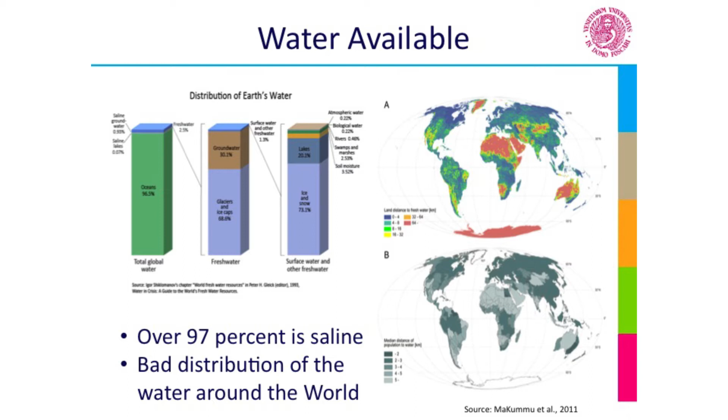And also we have to analyze that there is a bad distribution of water around the world, with a large part of the world where water is not available, and we can see on your right the distance that sometimes there is between the people and the first catchment of water.

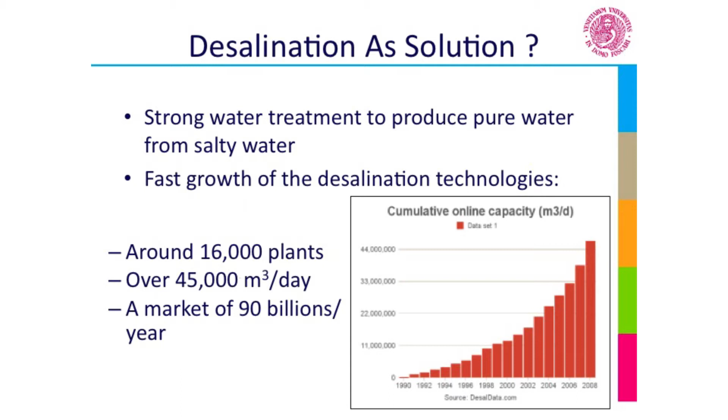And so in the last few years, decades, people started to think about desalination. Desalination is a technique that tries to take the salt out of salty water to have pure water to give to the people. Desalination technology is a strong water treatment, normally with high technology, with high expense of energy, and it is also very expensive to have it.

But in the last years, because of that bad distribution of water, these techniques are growing very fast. In fact, right now there are around 16,000 plants with over 45,000 cubic meters per day of water treated, and with a market that is increasing very fast, that right now is around 90 billion euro per year.

But as I said before, desalination is a technology that needs a huge investment for the plants, for the technology, for the techniques, and also for knowledge. In this way, only the rich and more developed countries can afford to pay for water from desalination plants, and also maintain them. They can operate with this technology.

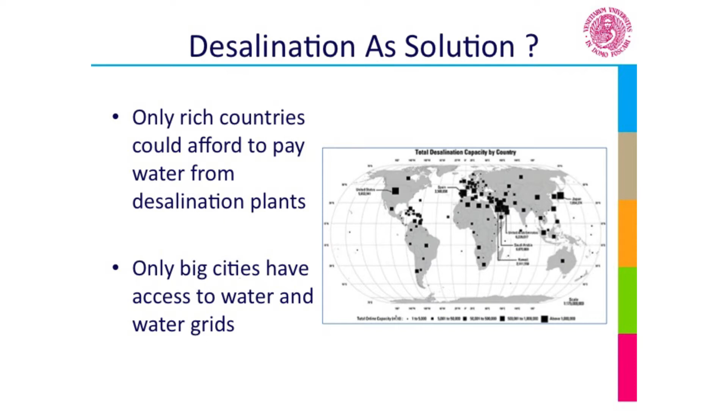So it was necessary to find a solution, a way for developing countries to more easily get pure or drinkable water from bad quality water. Another problem is in fact the distribution. Only the big cities can have a water grid, can have potable water, and it's quite difficult to find good quality water in the countryside or in isolated places.

So we have to find small plants, easier to maintain, that at the same time can be put in isolated places. Desalination is composed, first of all, of two main techniques. One is with membranes, for example RO, reverse osmosis, or the thermal process. In the thermal process, we heat the salty water or the wastewater, then we collect the vapor and condense it, and we have pure water.

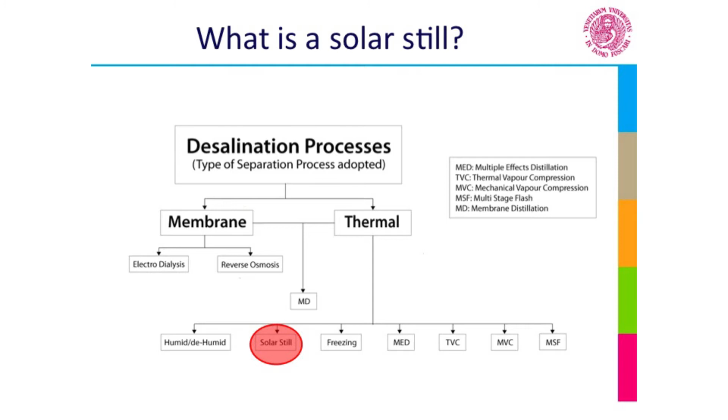One of these technologies that I underline is the solar still. I'm going to explain what a solar still is. The solar still looks like a simple greenhouse where we put the water inside. The solar energy enters the greenhouse, and through the greenhouse effect we have evaporation of the water.

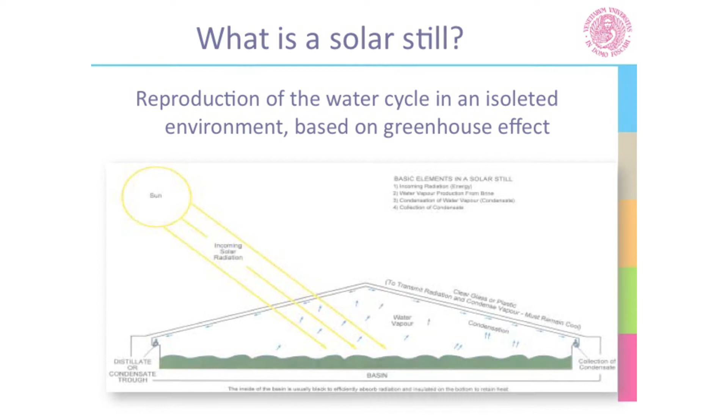The steam condenses on the internal surface of the transparent cover, and we collect the pure water. The salt remains on the bottom, in a black bottom basin, and in this way we have pure water in an easy way, with an easy technology, we can say, and also easy to understand. This is the main issue for the people in developing countries.

So the solar still has some advantages. First of all, the lack of external energy, so it doesn't need an electric grid because it works only with solar energy, and this is very interesting for isolated places where normally electricity, petrol or hydrocarbons are not present, so it's difficult to have the possibility to use electric energy.

And also, once we buy the solar still, it doesn't have costs for the production of water, because all the energy and the process comes from solar energy.

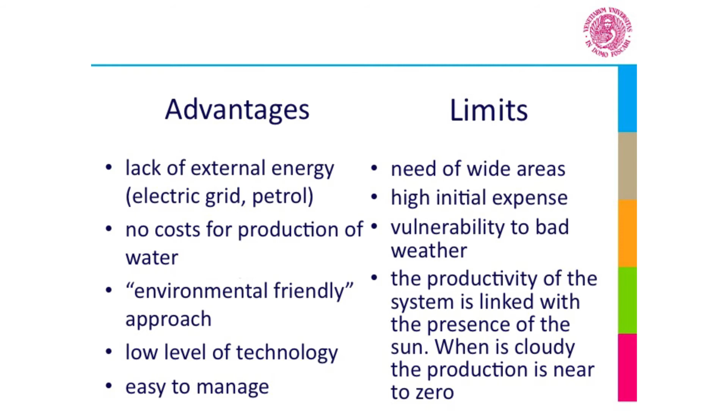But on the other hand, we have some limits. First of all, we need wide areas to have a good amount of water. In fact, this is due to the low energy per square meter from solar radiation. We have a high initial expense to build the greenhouse, but we think that afterwards we don't have any more costs for the production of pure water.

We have a vulnerability to bad weather. In fact, the production and yield of pure water decrease very fast with bad weather, and also it is not suggested to put this system in the northern part of the world, where the sun and solar radiation are very low.

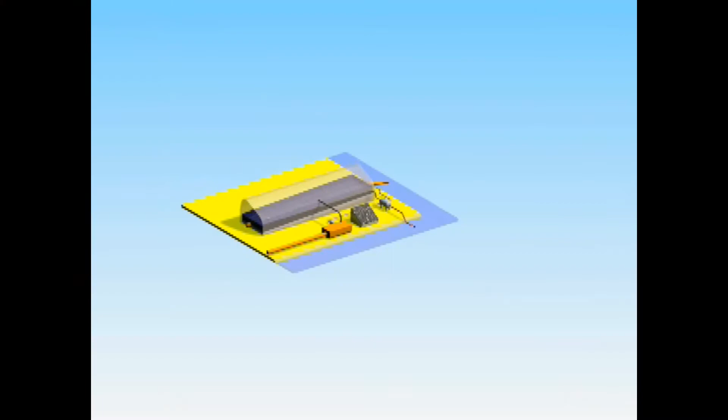But from this point, we started and we tried to find a new way to improve the efficiency of the solar still, and to limit the area needed to build it, increasing the production and the yield per day. First of all, we catch the salty water or wastewater, and we put it inside this new kind of solar still.

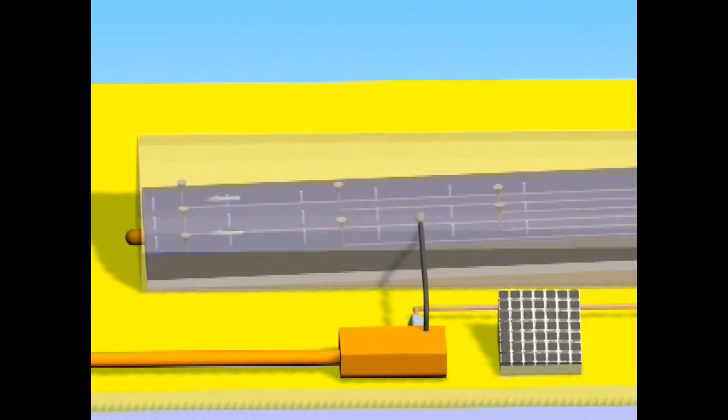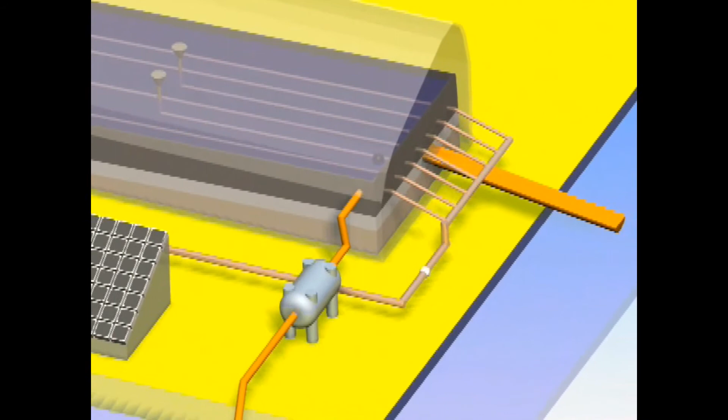Here the salty water flows inside the black basin, and the solar radiation enters the greenhouse. The energy heats the water, and we produce vapor. The vapor is collected by the suction of air through a small fan, and we condense it with a heat exchanger with the water that we are collecting, which is quite cold. In this way, we force the thermodynamic processes inside the solar still, and we can have a higher yield per day.

In fact, a common solar still that I spoke about before has a production of around 4 or 5 liters per square meter per day, with a thermal and energy efficiency of around 45–50%, and needs maintenance. The maintenance is because each day we have to open the system and take out all the salts that stay inside the basin.

The new solar still that we are studying has shown that we can have a yield of around 10 liters per square meter per day with an efficiency of 56%, and it doesn't need maintenance because we have a continuous flow. In fact, as I showed you in a video before, the water continuously enters from one side and goes out the other side, and we take out the water before the saturation point of the salts in the solution. In this way, we don't have solid salts inside the solar still, we don't need maintenance, and the system works autonomously.

Also, if we collect all this information, the system has been chosen as one idea for the development of humanity by the United Nations because it has some good advantages. First of all, it doesn't need maintenance. It also has a low environmental impact, is easy to use for local people, and has high scalability, so we have modules that we put in parallel to get more production, and it has good efficiency.

There is also this United Nations program named IDEAS, which wants to catch technologies that are easy to use, but also can be constructed and managed by local people. In this way, this new kind of solar still became one of these ideas for the development of humanity. And I will show you after some examples of application and cooperation with this solar still.

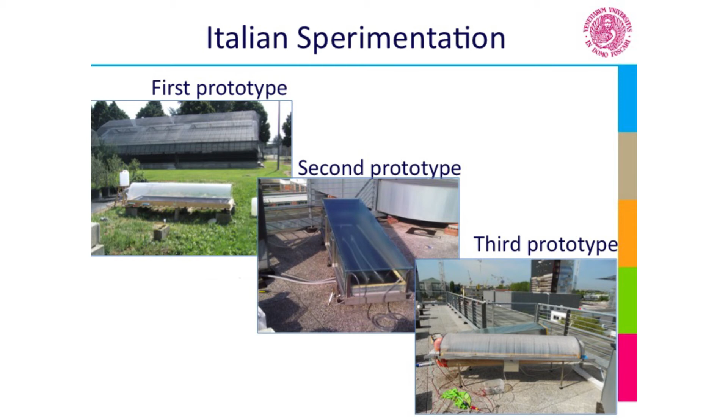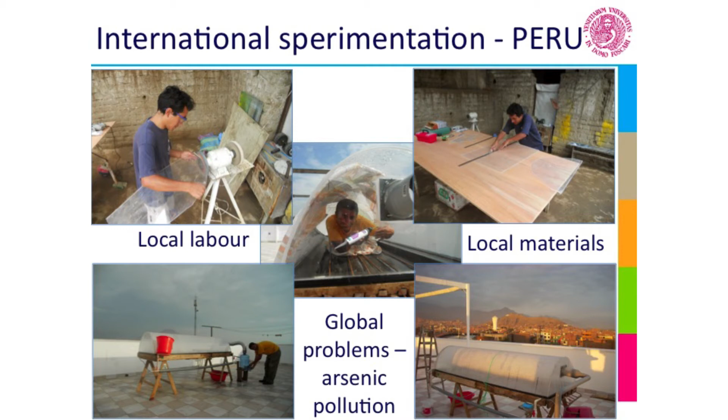First of all, we have done some experimentation with the Ca' Foscari University of Venice. We have done 3 prototypes. We are improving the solar still and testing it. Afterwards we moved to some countries, which I'm now going to explain, to develop and test it exactly where our target is. First of all, the idea of the project was to collaborate with some Italian or international NGOs in different places of the world with this aim.

First, to use local labor, to explain to them how to build it, how to maintain it, and how to use it, and using local materials to solve the global problems that they have in different places around the world about the water quality. For example, here you have an example from Peru.

In Trujillo, we built this solar still. And there is a big problem of arsenic pollution in the water, in the groundwater, from the mine factories that there are in that area that are polluting the groundwater.

And in this way, we explain to the people how to build it with the materials in the market of the villages, and after we build this solar still that we put on the roof of a small school, and we are giving the water to the children, to the students that are studying there.

And from this first test that we have done, we discovered that a great improvement of this solar still is that normally the people, when we give them high technology that is quite closed, that is difficult to understand, the people don't believe it so much about the water. If we think that normally the people drink water, especially in Peru, they drink water that is transparent as our water, but they don't understand that inside there is arsenic that is not so good for the health.

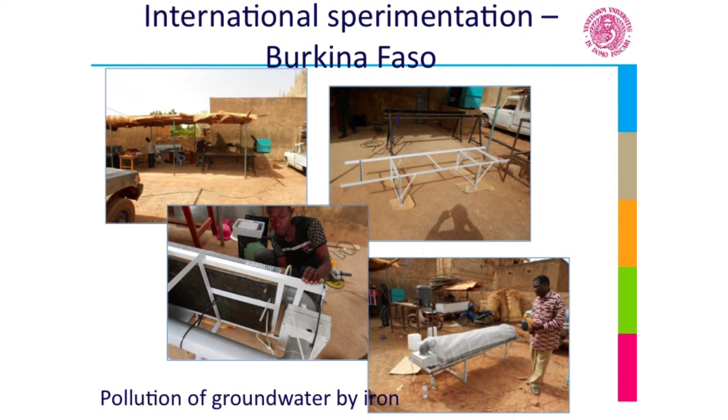And we have operated in the same way. We built it, we constructed it there, we taught the local people how to build it, with local materials. And right now, this is a small factory. It's quite strange, but it's a factory, it's a laboratory. They started to build there and put it in the local market, and diffuse it around the country.

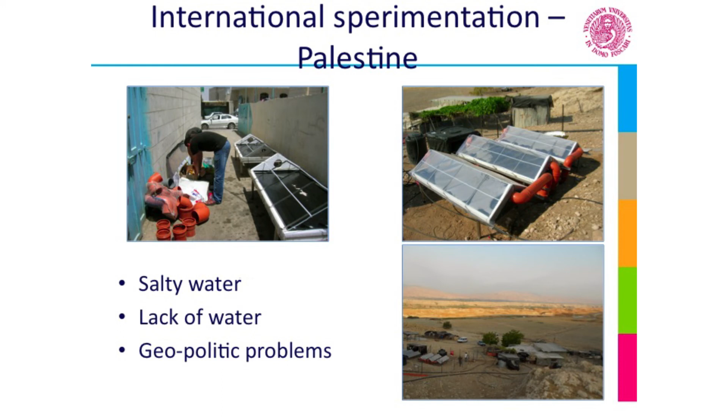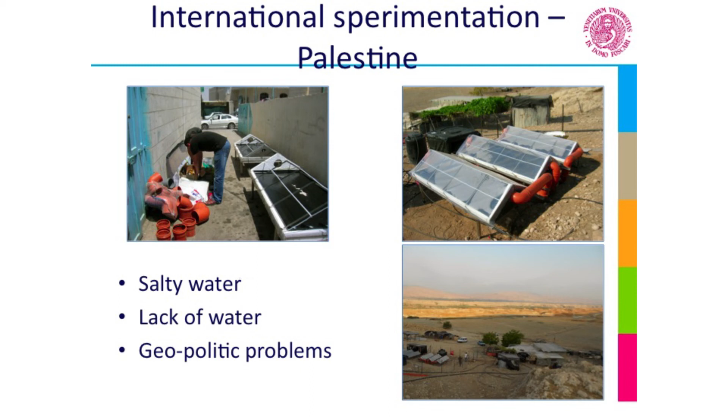We have done another test, another collaboration also in Palestine. Here the situation was more difficult because they are drinking salty water. They don't have pure water, and also there is a lack of water. Another big problem: there is the quality of the water, but also the quantity of the water. There the lack of water was very deep, and it was very salty. And also there are some geopolitical problems that don't permit the local people to have good access to the water.

There also we operate in the same way. They built it, they constructed it, and they put it in a local and really isolated place, as you can see on the bottom right. We are in the desert area, and we gave the pure water to the local community that lives in those tents, and they need it. Also it's an easier system, easier to move because of problems with the other communities.

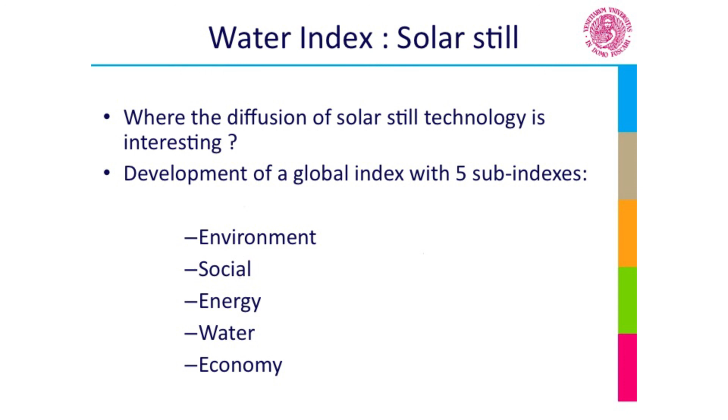So after this, we are developing right now a new stage to understand where the diffusion of the solar still around the world can be interesting. Developing a global index, an economic and social index, that is constituted by 5 sub-indexes, and that takes into account different problems that we analyze. And the sub-indexes that we are taking in our analysis are environment, social, energy and water, and economy.

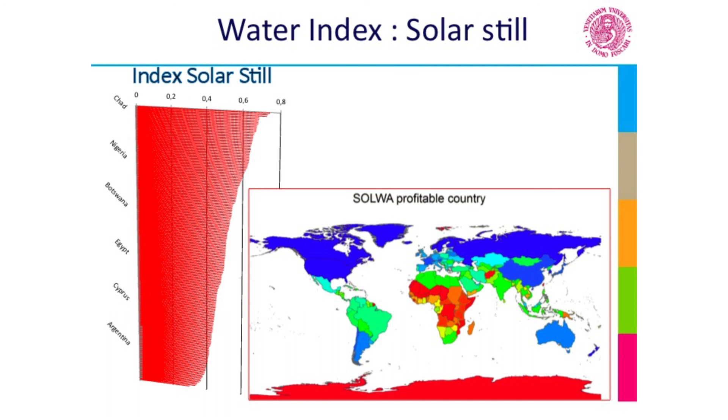And we are computing all these indexes to find where the diffusion of solar stills can be interesting, but more in general, simple and easier technologies for water treatment around the world, especially with the aim of isolated areas with difficulty to have access to global grids, water grids, and with a scarce quality of water in general. And these are the first results, but we are developing this index further to have better results.